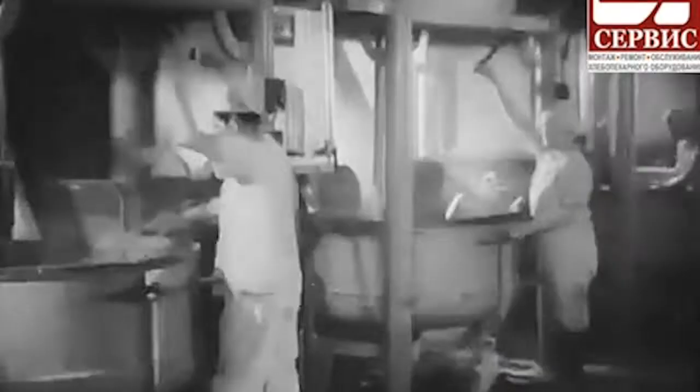This Isle of Silence project begins with a series of individual approaches to Moscow's industrial past. The history of the city and the plot is relived, and with the help of the client, it is concluded that the best way to proceed would be to appeal to the Russian production capacity from an approach that modernizes it while maintaining its initial essence.

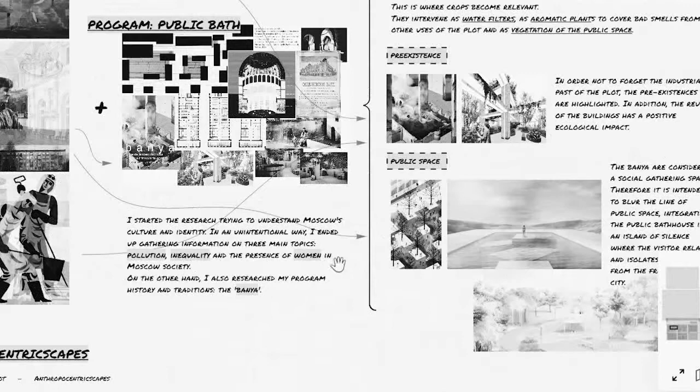The project will be self-sufficient, producing what is necessary to meet its needs and those of its clients, from fashion and recycled textile formwork to complex thermal circuits that do not need an external individual to filter or clean them.

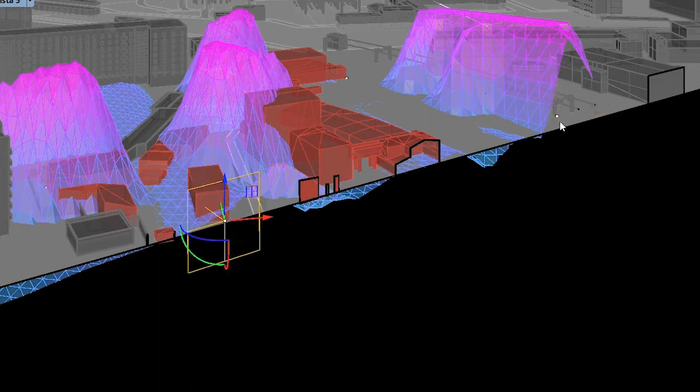The master plan mixes various types of conditional and parametric growth strategies, with the first one based on energy spots, which will be the production spaces of the project, the most important places in the area regardless of the program. You can visualize the order in which the project spaces will be placed according to a hierarchy of project importance.

The second method of implementation, which will be intertwined with the rest, consists of a project of volumetric conquest of spaces based on the energy required by the project rooms and the route that you want to establish in order to leave the spaces.

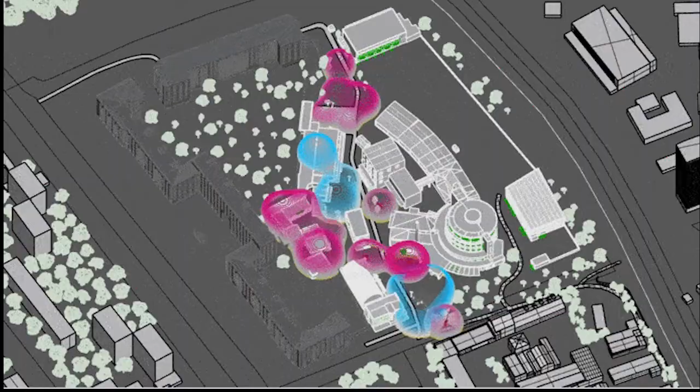The third strategy conditions the inputs and outputs of the project's inhabitants' flows that will inevitably make the project more complex.

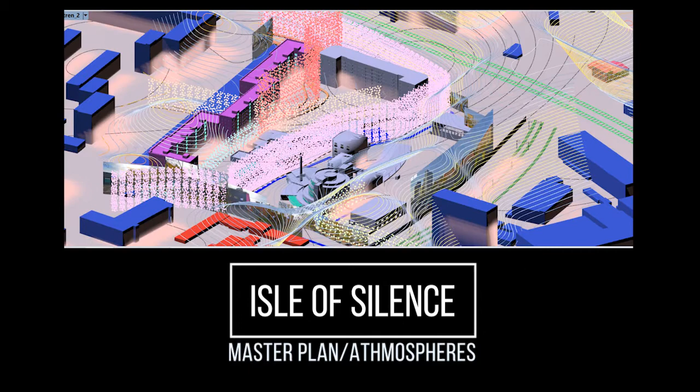Based on these three growth methods, an integration plan will be developed that will initially consist of program bands distributed according to their need for protection and tranquility against the stimuli of the city.

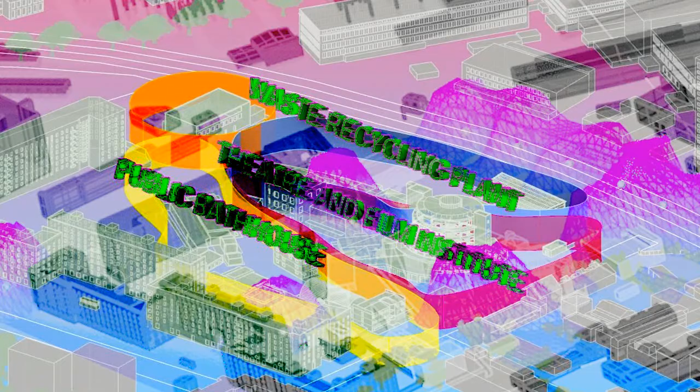The hotspots will be generated, and from there the program will grow according to the needs and hierarchies established between us, the architects. Growth in height, the use of residual spaces from other programs, and the energy and raw material requirements of each of the rooms will prevail.

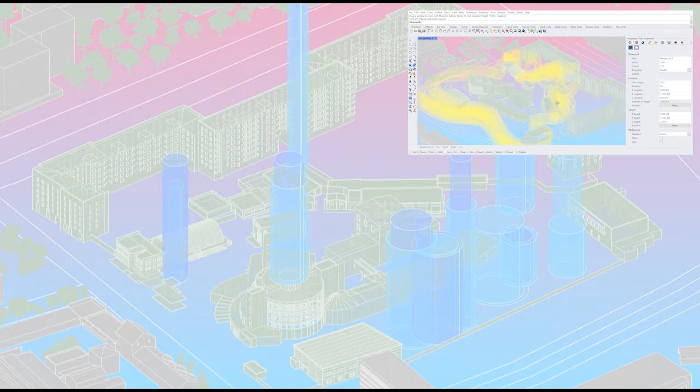For this reason, a growth contract will be made with a series of rules. Instead of dividing the parcel from the first moment, each member will conquer it according to these laws. You can add or erase any energy spot and increase or decrease its importance inside the overall project.

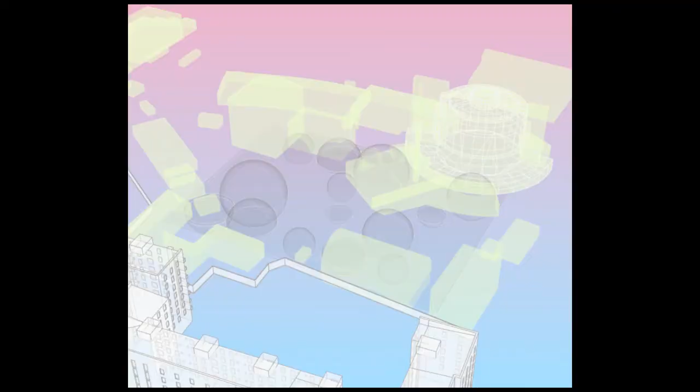At the time of formalizing the ideas, several prototypes appear. The first may be the result of the colonization strategy or a detail of the facade in which the water flows through the spheres while serving as an insulator.

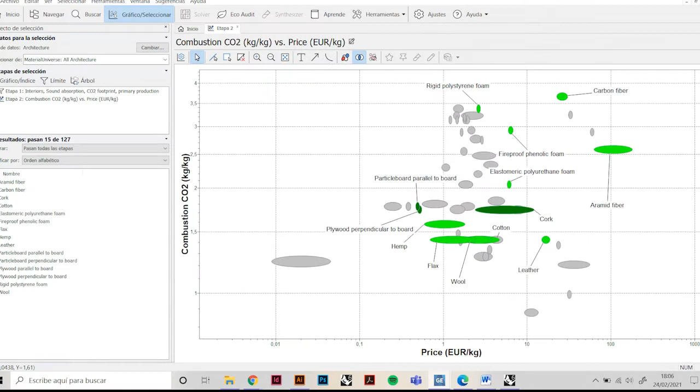The second is the result of an intensive study of insulating and ecological materials. The third prototype forms a habitable scheme that protects the quiet spaces of those who provide them with matter and energy. The result will be a complex space.

We conceive the model as an island of silence in the city.